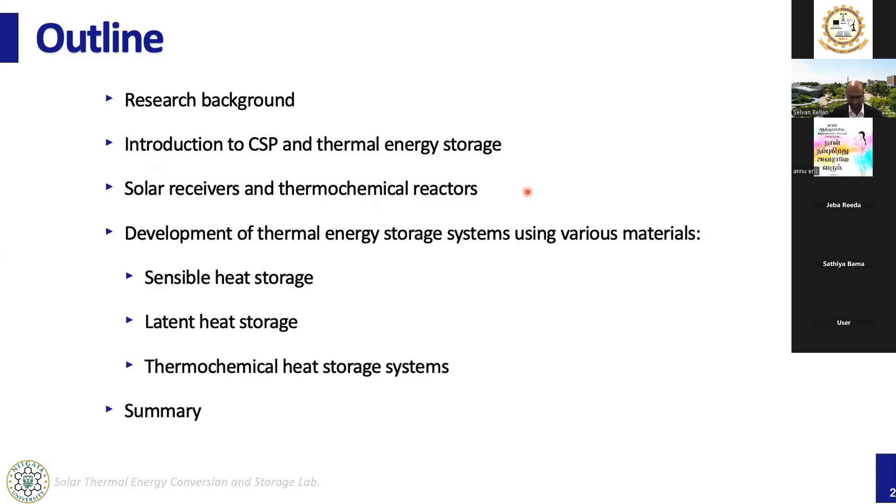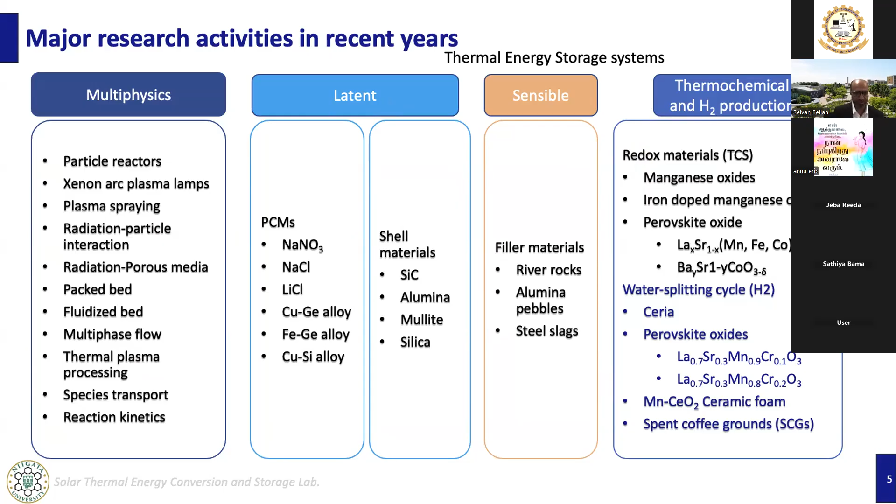So for better understanding, let me give a brief introduction about concentrated solar power technology, how it works, what the important components are, and why we are developing all these prototypes. Let me explain all those things. So let me begin. Let me give a brief introduction about the concentrated solar power technology.

I guess some of you may know about concentrated solar power. However, let me give a brief introduction for the people who are not aware of this technology. This technology converts sunlight into thermal energy first, and then the thermal energy would be used for electricity generation, or for fuel production.

As you can see, the plant consists of important components like the thermal energy storage system, central receiver, heliostats, gas turbine, everything. So let me explain how this plant works. This is a central receiver tower, which is surrounded by rings and rings of heliostats. Heliostats are nothing but mirrors, which track the sun's movement throughout the day and reflect the sunlight over the receiver.

In such a way, it creates concentrated radiation over the receiver. As a result, the receiver would be heated up. At the same time, heat transfer fluid, like water or molten salt, would be pumped to the receiver where it circulates and receives the thermal energy.

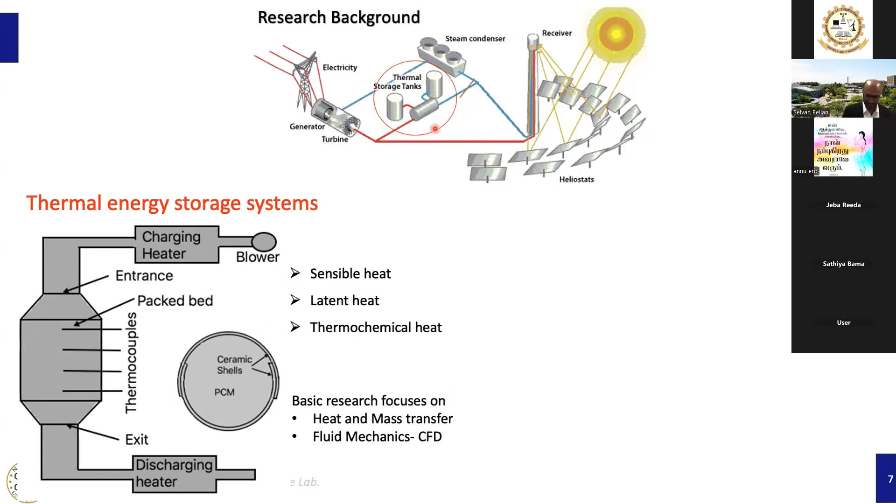Similarly, we have been developing various redox materials and perovskites for thermochemical heat storage. Let me present all these systems in the later slides. So this is just a brief introduction to where our research is mainly focusing in CSP components. This is one of the important components. And another component is the solar receiver.

Here the concentrated radiation can also be used for syngas or fuel production. For that, we have been developing various thermochemical reactors based on two-step water splitting cycles, as shown here. These reactors convert sunlight into syngas or hydrogen. Initially, the sunlight would be converted into thermal energy, and then the thermal energy would be used for thermochemical processes to produce syngas and hydrogen.

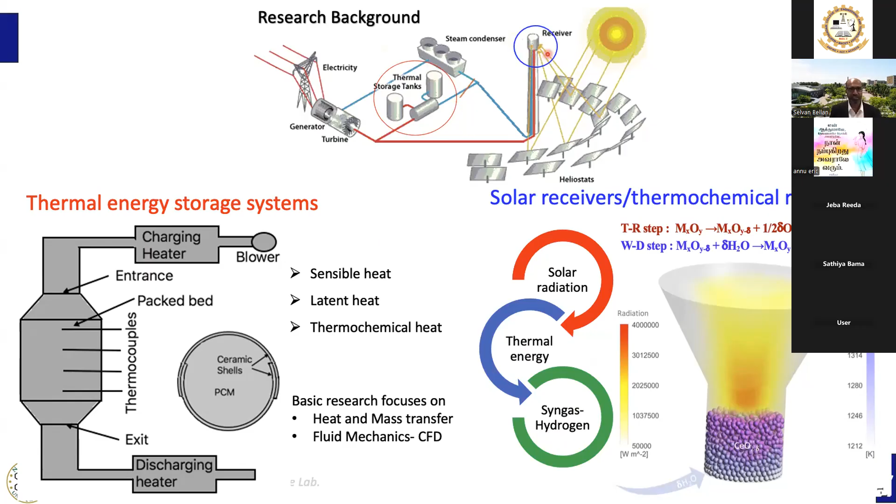So our research is mainly focusing on these two components. For that, we have been developing various prototypes. Let me present them one by one. Let me begin with the hydrogen production system.

To produce hydrogen using solar energy, various solar reactors have been under development by various research centers, with various concepts as well. And our concept is to combine the beam down optics and the fluidized bed reactors.

Can you hear me? Hello? Excuse me, can you hear me? Is everything okay? Yes, sir. Can you hear me? Yeah, is everything okay? Yes, sir. Okay, yeah. Thank you.

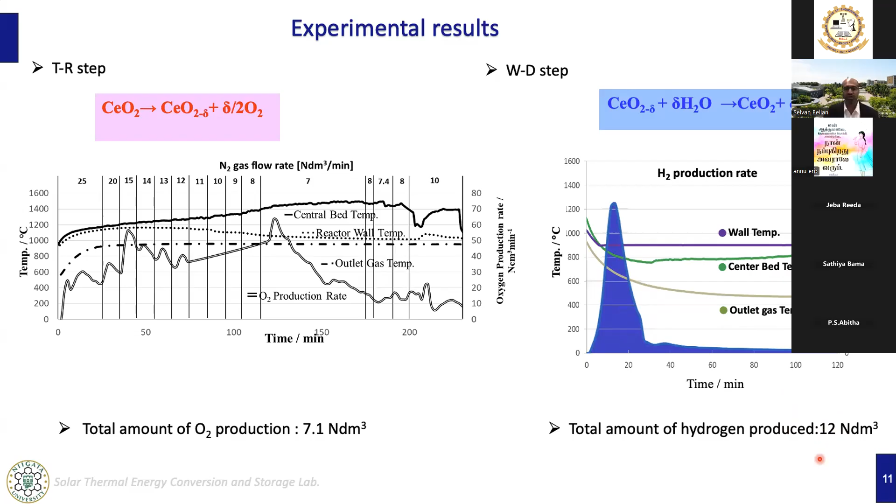And as you may imagine, this reactor involves various physical and chemical processes. So to understand the system and to improve the performance, we need the details of the heat transfer, the chemical reaction rate, and the radiation transfer inside the reactor. So we need all these details. To obtain them, we developed a numerical model by the combination of computational fluid dynamics, discrete element method, and discrete ordinate radiation model.

And this model has been developed based on various assumptions. The flow of the gas phase is simulated from volume averaged Navier-Stokes equations, and the motion of every individual particle inside the bed is tracked by Newton's second law. And the particle collisions are modeled based on the soft sphere method. Based on these assumptions, you can see the governing equations to predict the gas velocity and to track every particle. To obtain the particle temperature, we solve this equation, and to obtain the radiation distribution throughout the reactor, we use the discrete ordinate radiation model.

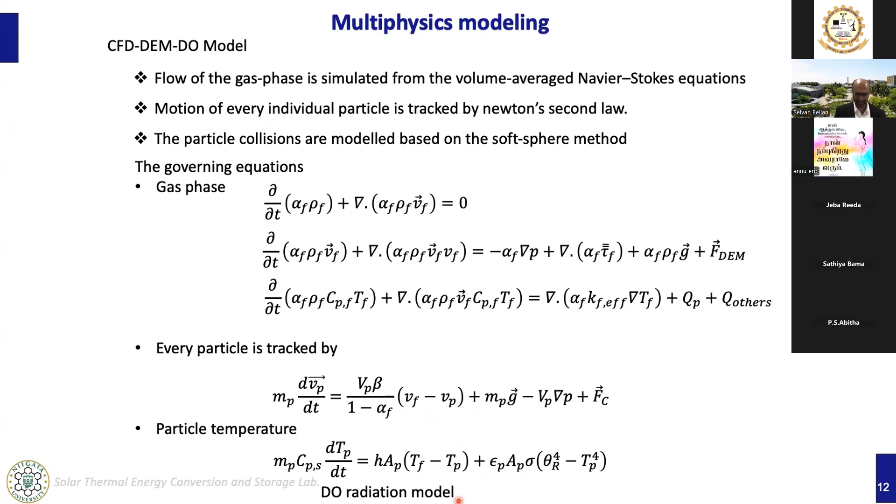So we developed the model, and then to verify and validate it, we performed experiments for the operating conditions shown here, and we did simulations as well. The experimentally measured and numerically predicted radiation distributions along the vertical and horizontal planes in the focal plane are compared here. As you can see, a reasonable agreement has been made between the simulation and experimental results.

And in this graph, you can see the central bed temperature, the pressure drop of the bed, and the gas temperature at the outlet. They have been compared here with experimental results, and as you can see, a reasonable agreement has been made between experimental and simulation results.

So from this model, we can obtain detailed heat and mass transfer and radiation transfer characteristics. As you can see, the particle temperature, the gas temperature, the radiation distribution inside the bed, the gas velocity, and the radiation profile. So all these details we can obtain from our model.

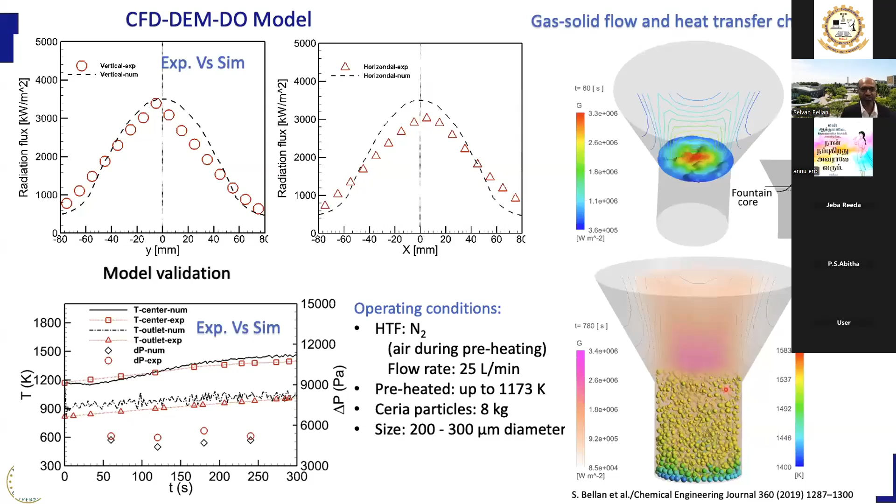So as I presented in the previous slide, using the lab scale reactor results, we have been upscaling to a 300 kilowatt reactor. For that, important operating parameters such as the particle size and the gas velocity, the appropriate operating conditions to fluidize the particles, and the effect of particle size, all these things we have been investigating using our numerical model.

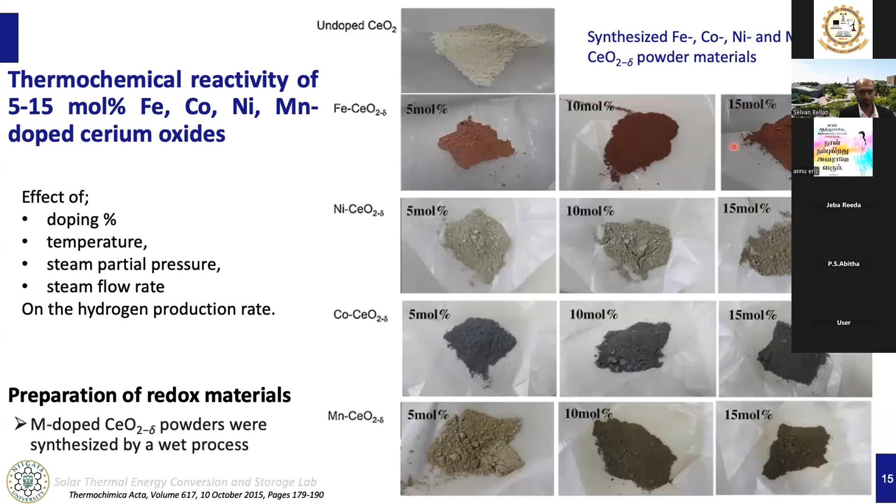the metal doping. And as you can see, the series of peaks are due to the fluorite structure. And as you can notice, there are no new peaks due to doping. And it indicates that 5 to 15 mole percentage of iron doped cerium oxide retains the fluorite structure of the cerium-based oxide as single phase.

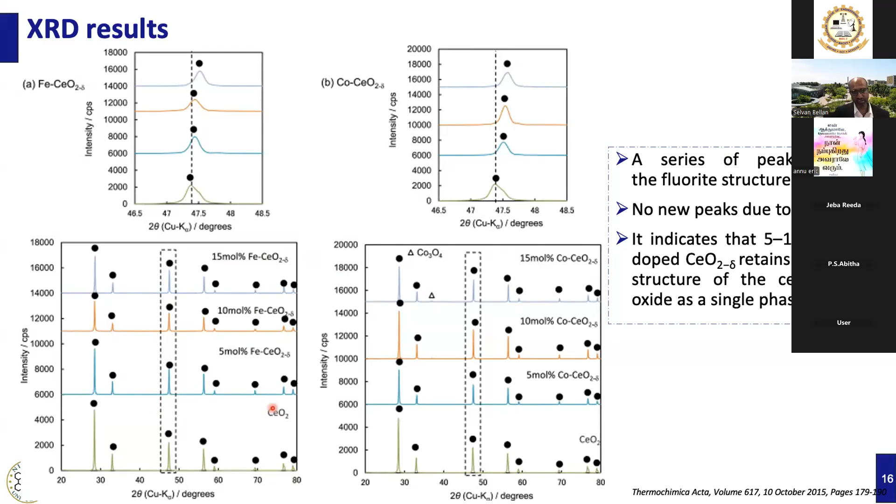And after synthesizing the materials, to test the materials, usually we take 1 gram of sample and put it in this platinum cup. And to perform the thermal reduction step, I explained the thermal reduction and water decomposition steps in the previous slides. The procedure is pretty much same, but here to test a small amount of sample, we use this kind of reactors, made of infrared furnace.

Usually we take 1 gram of sample, and then for thermal reduction step, we pass nitrogen gas. And when the temperature reaches more than 1,300 degrees, so in this case, we fixed 1,500 degrees Celsius, the thermal reduction step takes place. As a result, oxygen would be released, right? So the mixture of oxygen and nitrogen gas would be collected and using the mass spectrometer, we can measure what is the oxygen production rate.

Similarly, for water decomposition step, we put 1 gram of sample in this platinum cup. So during the second step, we need to pass nitrogen with steam. So for that, we have this oil bath, distilled water trap setup. As you can see here, we pass nitrogen gas. So the mixture of steam and nitrogen would be supplied to the reactor, and how much hydrogen would be produced, we can calculate using the water displacement method. So like that, using these 2 reactors, we can test the synthesized samples.

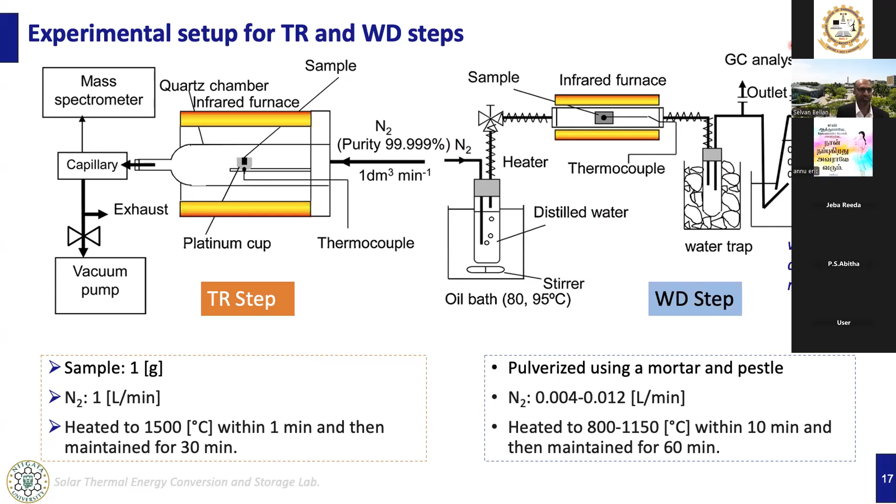And in this slide, you can see the cycling reactivity of 5 mole percentage of metal doped ceria. And as you can see, the oxygen evolution is nearly constant level in all these 6 cycles. So among these samples, 5 mole percentage of iron and cobalt doped cerium oxide showed a relatively greater oxygen productivity than undoped cerium oxide.

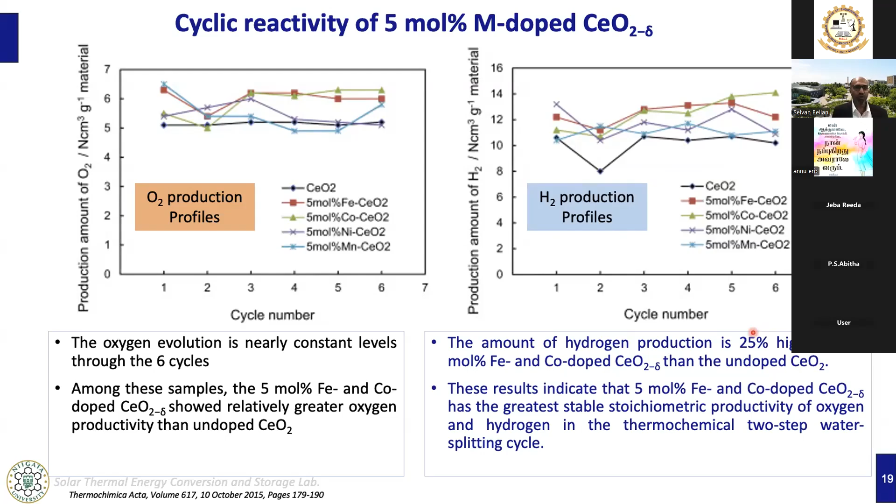This slide shows the overall, all samples, oxygen and hydrogen production for different amount of doping. This slide shows all samples like 5 mole percentage of iron, 10 mole percentage of iron, 15 mole percentage of iron. So other materials also. So from 5 to 15 mole percentage of doping.

So all results, as you can see, the peak rate of oxygen evolution rate for iron, cobalt, and manganese doped cerium oxide increased with increase in doping. However, the peak rate of hydrogen production decreases when increasing the doping. And lower content of a doping agent can favor the overall efficiency of the metal doped cerium oxide thermochemical cycles. That also you can notice.

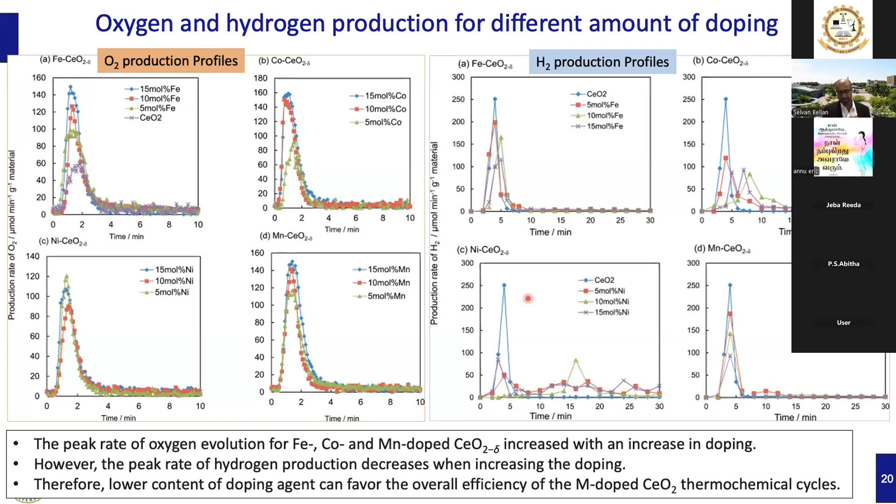And similarly, we have developed perovskites as well, the thermochemical two-step water splitting cycle using perovskite oxides based on lanthanum, strontium, manganite.

As you can see here, the oxygen production rate and hydrogen production rate for different samples. And this green line shows the ratio. And here you can see, again, for different samples. So like that, we have been testing various redox materials and perovskite materials for solar two-step water splitting cycles. And after synthesizing the samples,

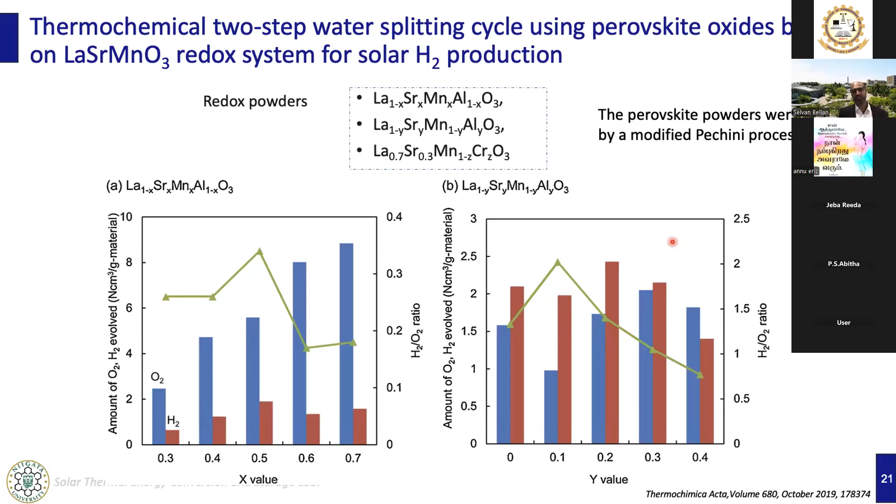We prepare different samples, and after that, this porous ceramic structure would be placed inside the reactor like a fixed bed. And then the solar radiation would be passed through the reactor, and then the thermochemical reaction, the so-called first step, the thermal reduction step, would be conducted for oxygen production, and subsequently the water decomposition step would be conducted for hydrogen production. So using this kind of ceramic porous devices, we have been producing hydrogen as well.

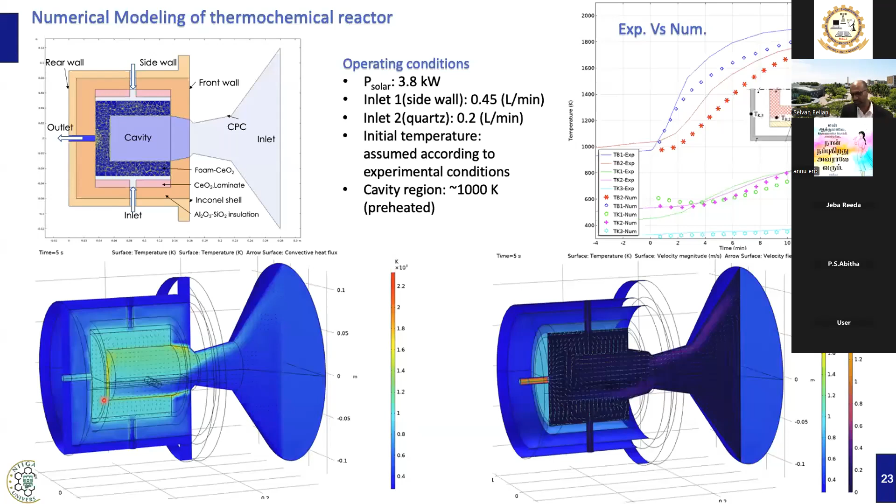So like that, we have been developing various thermochemical reactors to test various redox and perovskites to produce syngas and hydrogen. Now, let me talk about another part of the CSP plant, the thermal energy storage system, which is one of the main components in a CSP plant to produce electricity 24 hours.

So as I explained in the introduction slide, usually we supply cold heat transfer fluid to the receiver, where it circulates and receives the thermal energy, and it would be stored in the hot storage tank, right? And during the night time, we can take the hot heat transfer fluid to produce steam and electricity. So like that, electricity generation would be 24 hours around the clock. So the thermal energy storage system mitigates the mismatch between the energy supply and demand.

And this component is shifting the power generation period from peak hours of solar insolation to peak hours of power demand. As you know, during the noon hours, we have a very good solar insolation. The radiation would be very high, right? So during the noon hours, we can produce more electricity. But usually at what time do we consume more electricity? Usually we consume during the morning hours or during the evening hours, right?

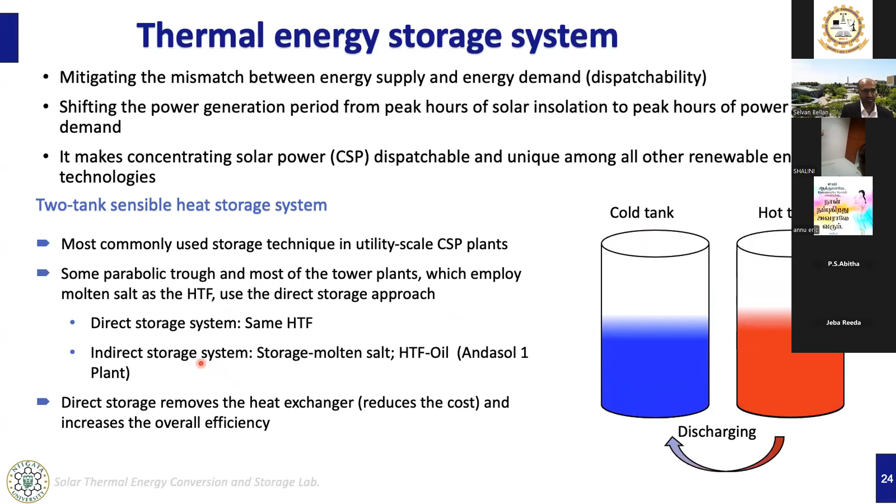So there are different storage concepts like direct storage system and indirect storage system. In the direct storage system, the same heat transfer fluid would be used in the receiver and in the storage media, whereas the indirect storage system uses different heat transfer fluids. The receiver heat transfer fluid would be different, the storage medium would be different. So we need an additional heat exchanger. So let me explain the direct, or two-tank sensible heat storage system using this schematic figure for better understanding. As you can see, we have cold heat transfer fluid, right?

So we supply the cold heat transfer fluid to the receiver, which is heated up by concentrated radiation. So the hot heat transfer fluid would be stored in the hot storage tank. Okay, so during the rainy hours or cloudy periods or at night times, we can take the hot heat transfer fluid for power generation, and then the cool heat transfer fluid would be supplied back to the tank.

So in such a way, using the same heat transfer fluid, we can supply from cold storage tank to receiver, and the receiver to the hot storage tank to the power block. So we don't need an additional heat exchanger. So the efficiency would be higher than the indirect storage system.

This is one example system, the Gemasolar Power Plant, using this kind of direct two-tank sensible heat storage system. As you can see, these two tanks are used for cold and hot heat transfer fluid storage. And this system gives 15 full load hour operation, which means if we don't have sunlight for 15 hours, we can produce 20 megawatt hour continuously for 15 hours.

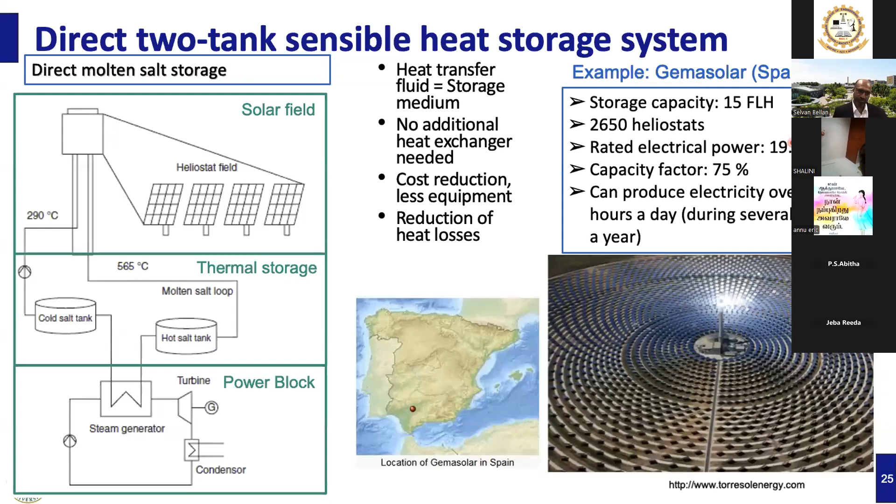So whatever the filling materials, the hot heat transfer fluid exchanges the heat with the materials, and the cool heat transfer fluid would leave through the bottom part of the tank during the charging mode. And during the discharging mode, the cool heat transfer fluid would be supplied to the bottom part of the tank, which extracts the stored energy from the capsules and leaves through the top part of the tank. In such a way, using one tank, we can do the charging and discharging processes.

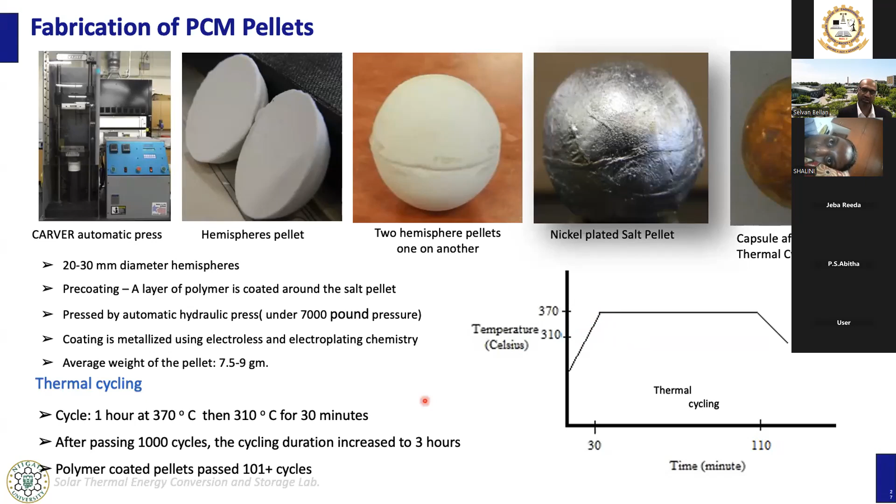As you can see, the test would be conducted between 310 to 370 degree Celsius. And after passing 1000 cycles, the capsule is stable and still working very well. So like that, we have been testing the degradation of the material for usually more than 2000 cycles. And to develop 1 kilowatt hour storage system, it requires more than 770 capsules.

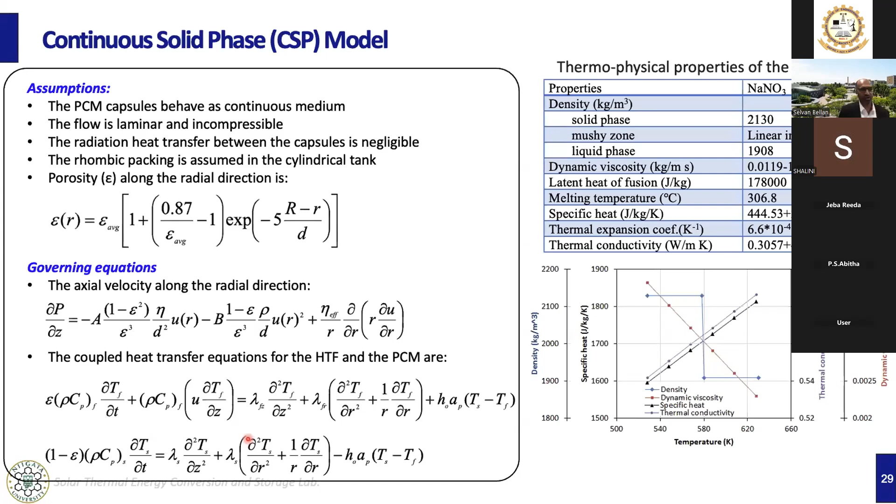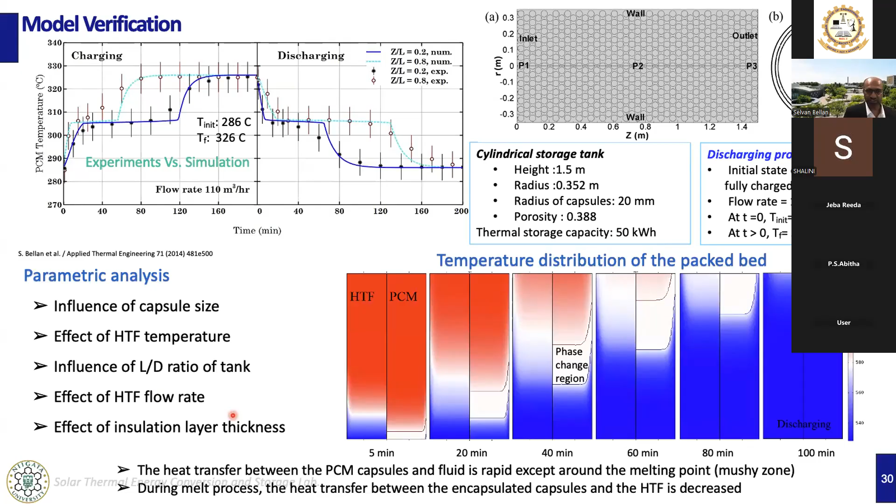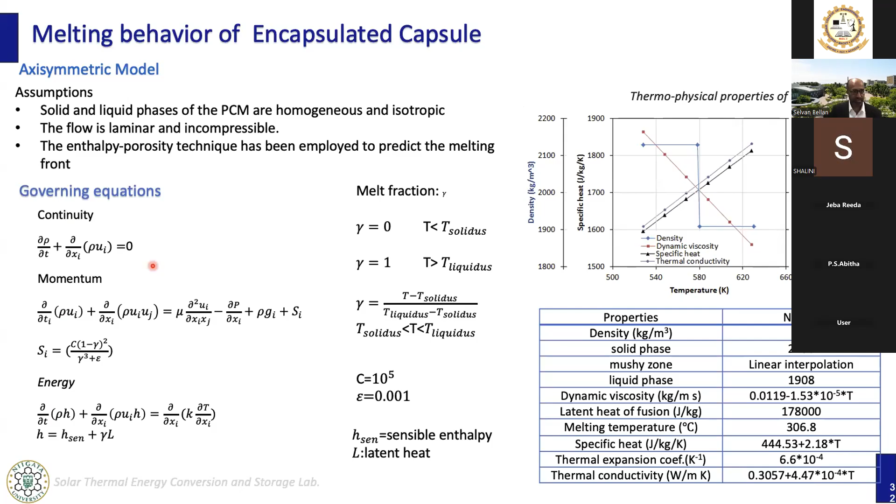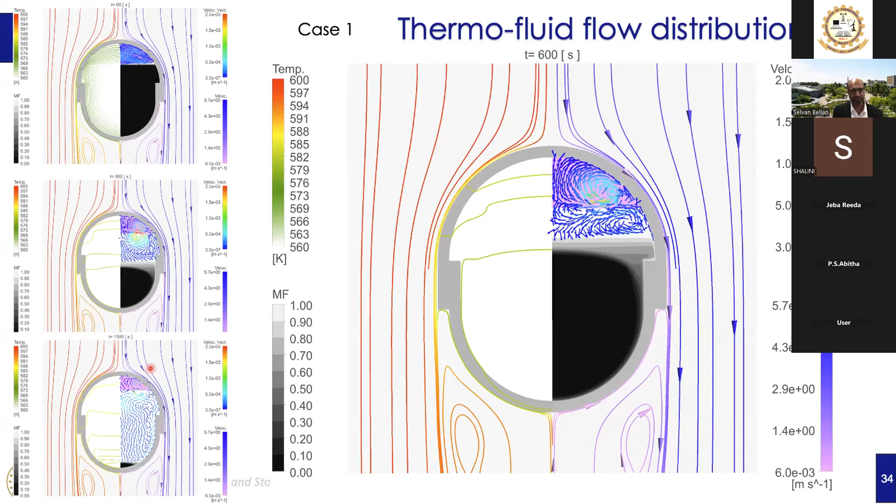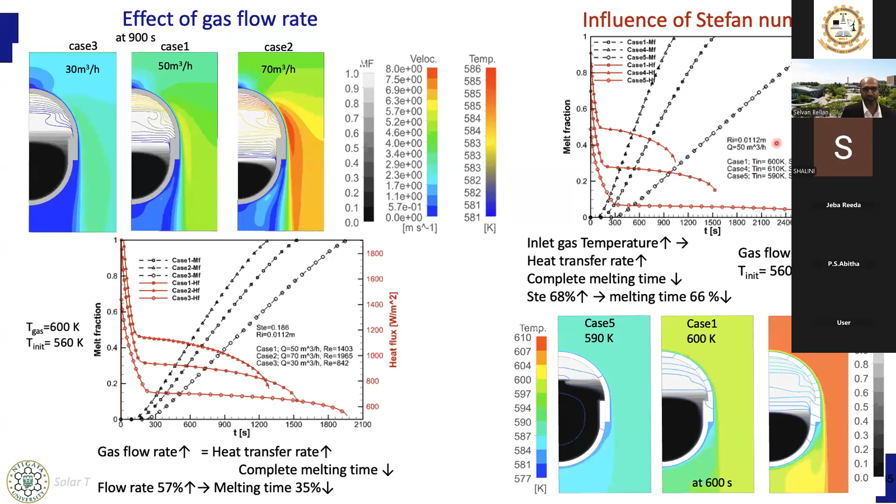Then we did the dimensionless analysis to obtain the generalized correlation for melt fraction and the Nusselt number. Using this Nusselt number, we can calculate the heat transfer rate between the capsule and heat transfer fluid for thermal energy storage systems. And this is another project.

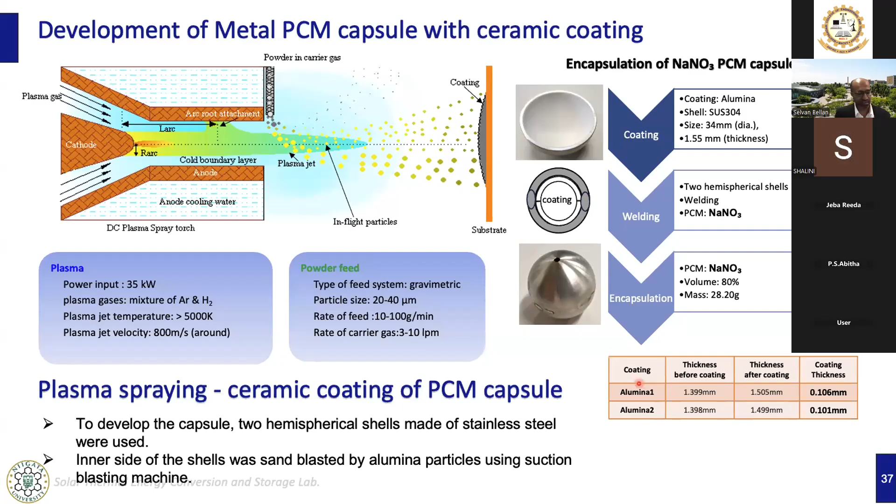We prepared two hemispherical capsules, then we joined them together and welded at the joint to make this kind of spherical capsule. In this table you can see the alumina coating thickness and details, and the other concept is the same.

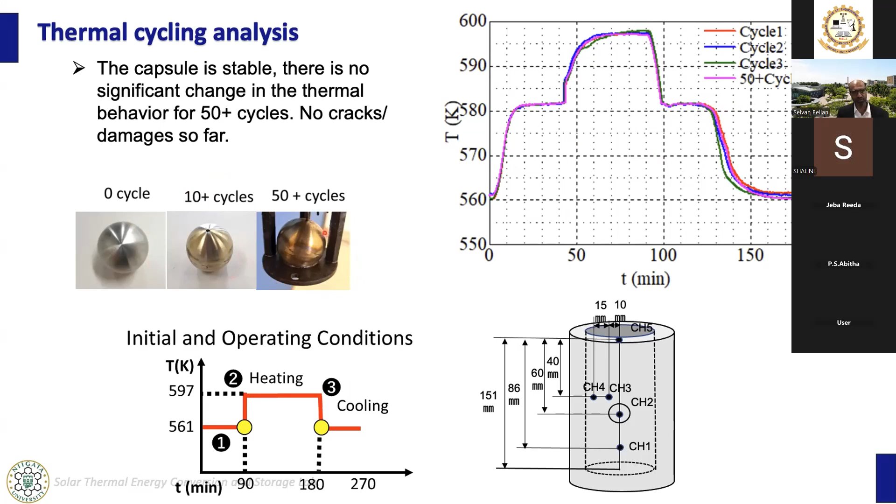Like that, we did charging and discharging experiments of plasma spray coated samples as well. These capsules are also promising, and we have been testing them. To develop this kind of capsules, we have been using various materials as well.

For example, we used iron germanium alloy as phase change material to develop a PCM capsule. It has potential as latent heat storage material. It gives higher storage capacity than other salt-based PCMs, and it gives quick thermal response as the thermal conductivity of this material is very high.

This material is thermodynamically stable in metallographic structure, and non-reactive with the shells. That is one of the important issues when you consider salts as phase change materials.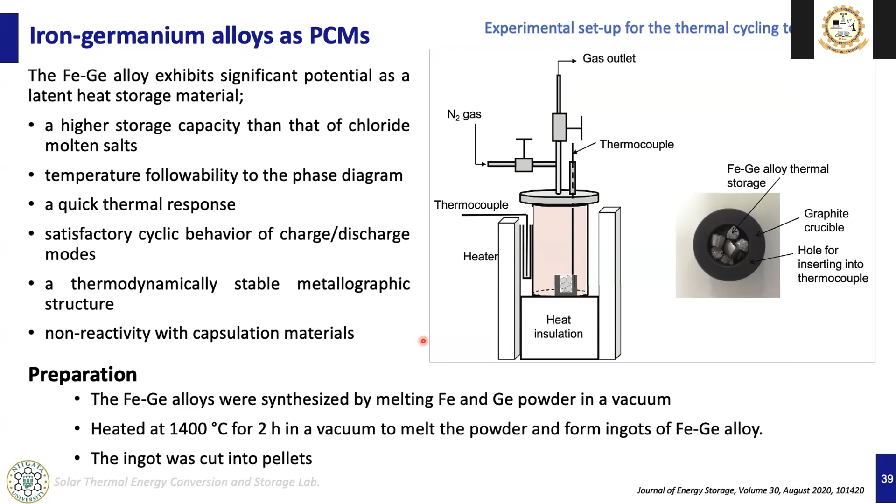To prepare these materials, the iron germanium alloys would be synthesized by melting iron and germanium powder in a vacuum condition, heated at 1400 degrees Celsius for 2 hours in vacuum to melt the powder and form ingots of iron germanium alloy. These ingots would be cut into pellets, and these are all usual procedures.

Here you can see the accumulated storage capacity of iron germanium alloy is much higher than other salt materials like sodium chloride and lithium chloride. These materials give a very good accumulated storage capacity per unit volume. In this graph, you can see the accumulated storage capacity per unit weight. But this is very important to compare different materials because the unit volume is important.

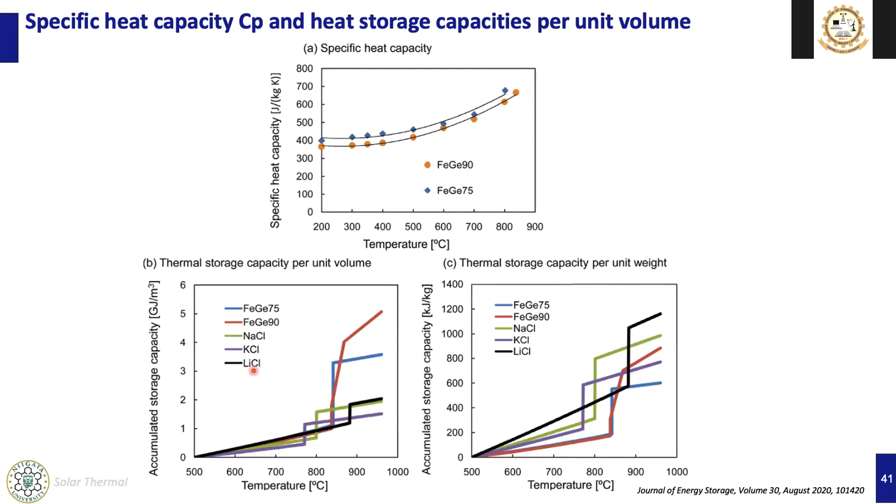Similarly to iron germanium alloy, we developed copper germanium alloy as well. We did XRD to test the patterns with different amounts of doping or percentage, and what the heat storage capacity is. As you can see, this material is also very nice to increase the heat storage capacities.

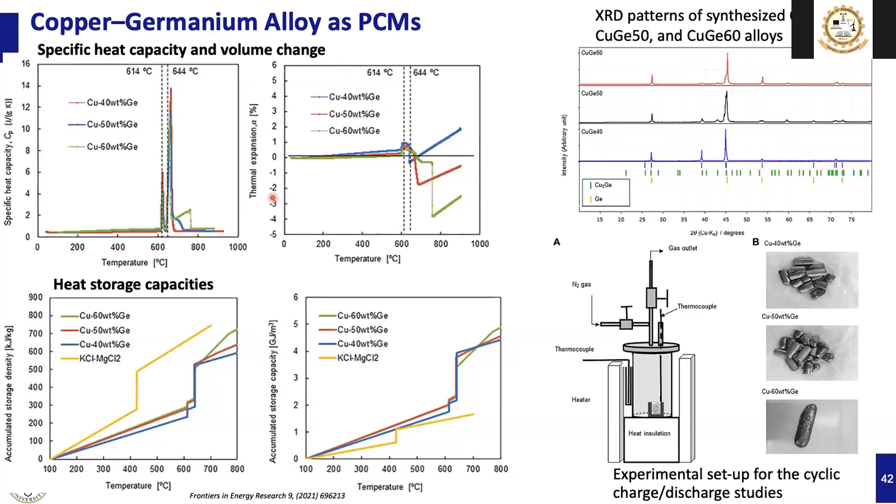Based on the packed bed setup, we developed different phase change materials, and based on the same packed bed approach, we have been testing and using different sensible heat storage materials as well.

As you can see, we use alumina balls instead of PCM capsules, and we tested different rocks, river rocks as well, as heat storage material. Using this technique, we can increase the energy storage density.

At the same time, as these materials are very cheap, we can develop inexpensive heat storage systems as well. So that is the main advantage of developing this kind of sensible heat storage system. So this is the prototype we developed in our research center. As you can see, we filled alumina balls, and then we did some experiments and simulations for the operating conditions as shown in this table. And we compared the experiments and simulation results. As you can see, we see a good agreement.

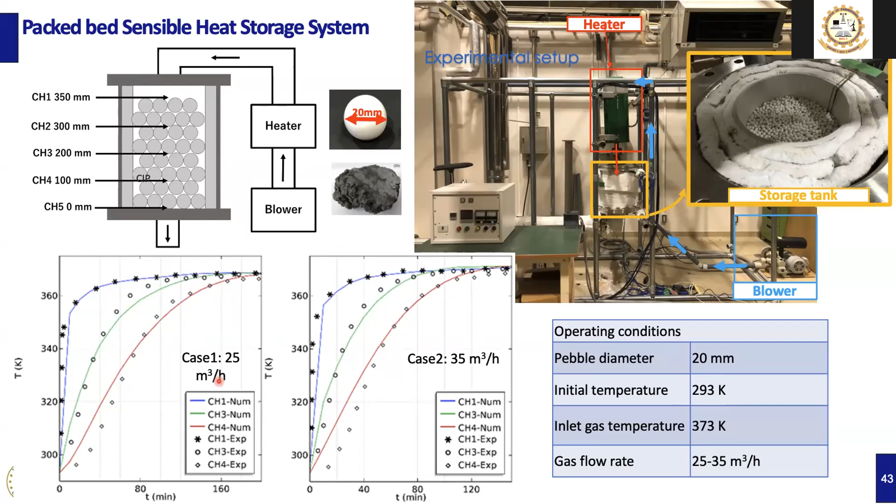Like that, we verified our model, and then we tested different natural river rocks as sensible heat storage material. These are all rocks collected from Morocco. Through a collaborative research with CIC energiGUNE Research Center in Spain, through this international joint research, we tested these river rocks as heat storage material.

So like that, we have been testing various materials, and then we have been developing small lab scale prototypes to test how these materials or prototype tanks work. And based on these results, we expand the design and tanks to pilot and commercial scale. This is our usual procedure.

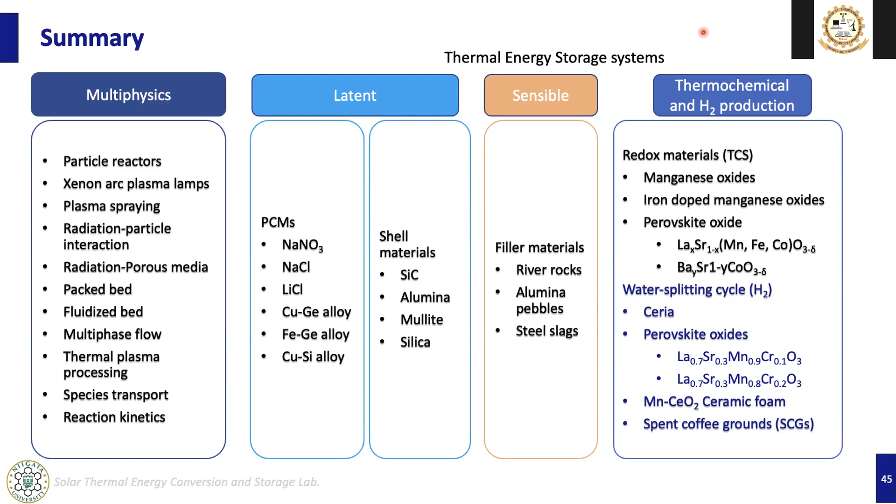And this slide gives you an overall view of different types of thermal energy storage systems. When we go from sensible to thermochemical heat storage systems, the complexity increases. At the same time, the heat storage capacity of the thermochemical heat storage system is very high compared to the sensible heat storage system.

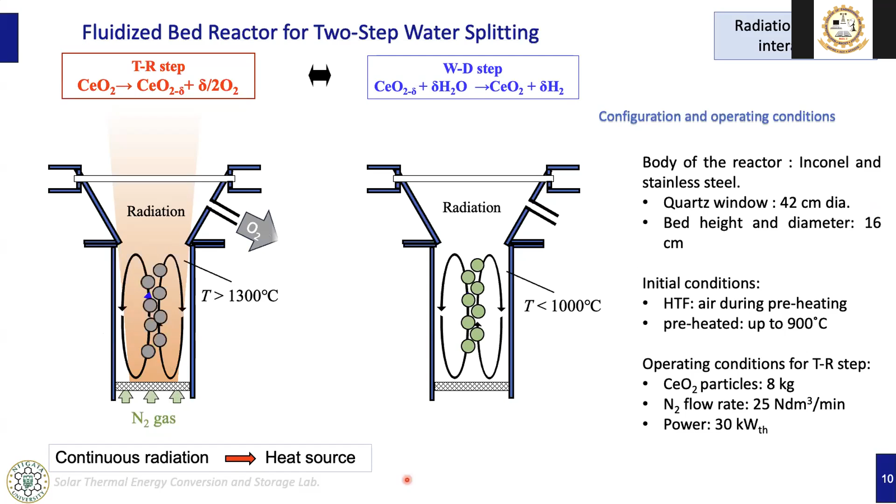During the morning hours, if you have sunlight, the sunlight would be converted into thermal energy, and then the thermal energy would be stored inside the tank. Okay, so we have enough amount of hot heat transfer fluid. During the afternoon, if there is rain, obviously there won't be sun, so we cannot get hot heat transfer fluid from the receiver.

So in that case, we can take hot heat transfer fluid from the storage tank to generate steam, and we can generate electricity. So it is possible during the rainy days. But if the rainy days continue for a couple of days, and we don't have enough hot heat transfer fluid, we cannot produce electricity. So it depends on the storage capacity of the storage tank.

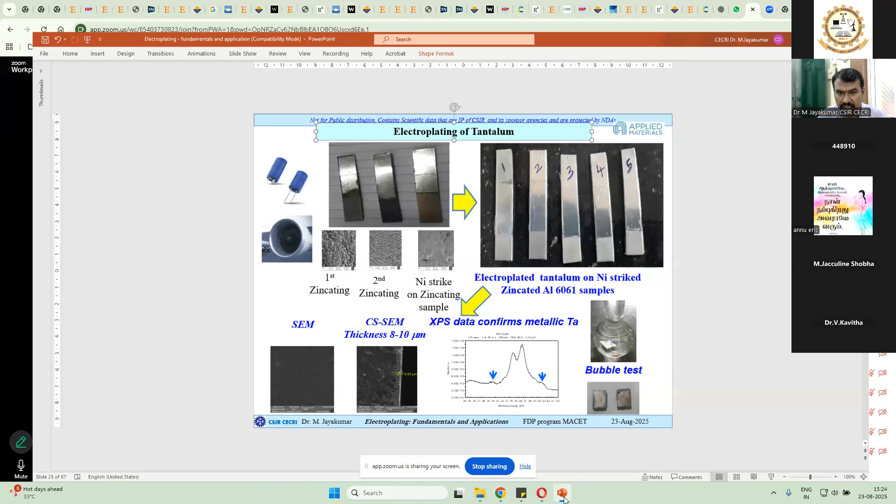Is the screen visible? Is the slide moving? Yes, sir. The screen is visible. Okay.

Just before I start, what is the background of our faculty, ma'am? Are they from engineering college or from arts and science college also? Both the colleges. It is like a faculty development program, so faculty from different organizations will be attending this session. Okay. They will be from chemistry background, physics, all background, right? Both physics, chemistry, and also engineering, sir. The research scholars also participate. Okay. There are nearly 77. Okay.

So hope the slide is visible, right? So for the next maybe 1 hour or so, what I will try to give is whatever we are working in the field of electroplating. Some of you who are from the chemistry background may be aware that electrochemistry is part of your physical chemistry, and we know what is Faraday's law, its application, and batteries. And in the last 10 years, there is a lot of interesting work in batteries. So some of you may be working in batteries, some of you at least may be aware batteries is one field. So in the field of electrochemistry, one unique area is electroplating.

I will not go too much into depth and give a lot of unwanted keywords or jargon to confuse you. My aim is just to give an idea what we are doing at CSIR-CECRI in the field of electroplating. Although we are using electroplated equipments every day, we just don't know the importance of electroplating. We know batteries because we have batteries at home for the UPS, in our mobile phone, laptop, even in two-wheelers and four-wheelers. In the entire field of electrochemistry, batteries are well known because they are related to energy storage and we use them every day.

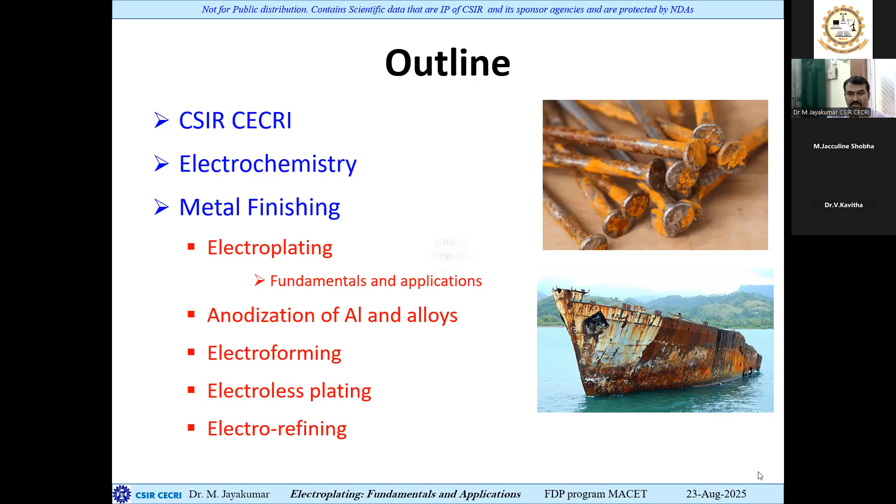So going back to the field of electrochemistry, let us have a quick idea about what is CSIR-CECRI. Maybe my other speakers from CECRI, Dr. Pandikumar or Dr. Tamilarasan, must have covered it. So I just wanted to spend a couple of minutes here. CSIR-CECRI is part of the CSIR group of laboratories. The abbreviation is Council of Scientific and Industrial Research. This is spread across 38 places in the country. Of those, three labs are in Tamil Nadu. So CECRI is here.

So we are in the tri-junction of Rameshwaram, Madurai, and Trichy. So we are in the middle of this triangle, around 2 hours from all these places. Another two labs are located here: CLRI, which works on leather, and structural engineering, which is SERC, Structural Engineering Research Center. So these three labs are in Tamil Nadu.

The primary reason why such a place got it is because all our labs, if you see, are in Delhi, Bombay, Chennai, whereas CECRI is in a very remote place even today. Although Karaikudi has become a corporation, it is still a small center. This particular town is also the hometown of Dr. Alagappa Chettiar, who is the founder, the brain behind CECRI Karaikudi, because he also happened to be a friend of...

You can see the photos here. Pandit Jawaharlal Nehru is there, and this is Shanti Swarup Bhatnagar. He is one of the founders of CSIR. This is Dr. Alagappa Chettiar, and the foundation stone was laid by Pandit Jawaharlal Nehru in 1948, and our institute is as on date close to 78 years.

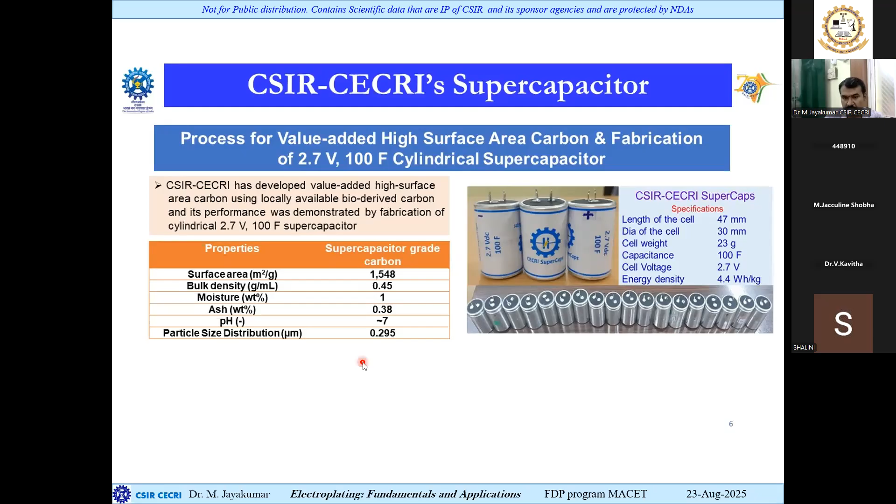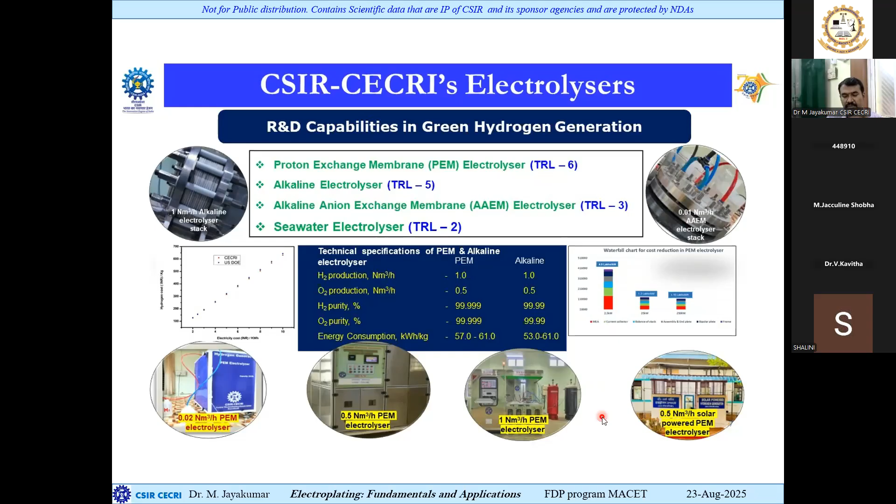So the field of electrochemistry, unlike other fields, is not a very old field.

I think slides are moving, right? Yes, sir. Yeah, okay.

So if I take the field of battery, everybody knows the lithium-ion battery, but the lithium-ion battery is today's technology. If you go back exactly 220 years, there was no battery at all. Michael Faraday found a relation between magnetism and electricity, and electricity didn't even come as a reality. So it was in 1800. Alessandro Volta, a native Italian, developed the voltaic pile. All he did was make stacks of zinc and copper. In between, there's a cloth soaked with sodium chloride or any other salt as a separator.

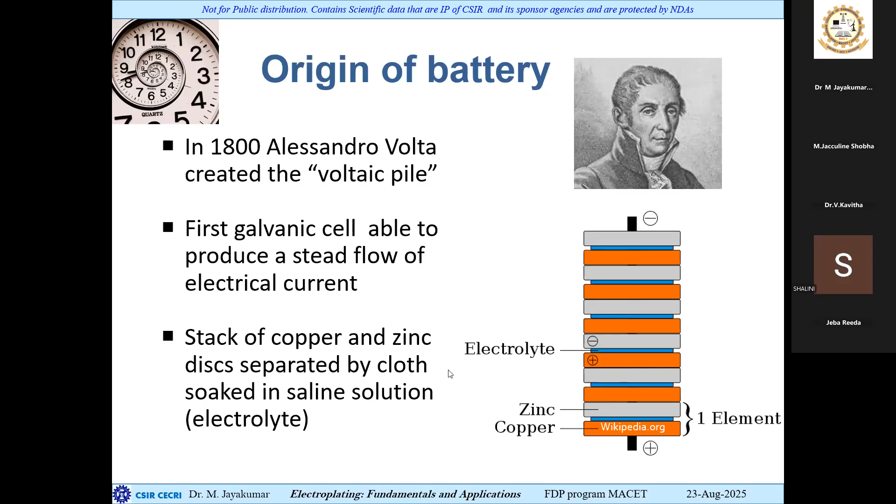Around the same time, there was an Italian chemist, Luigi Brugnatelli, who is considered the father of electroplating. Although he was Italian, he didn't stay in Italy; he went to France. That is where the electroplating field itself was invented. When I say electroplating, plating is nothing but coating.

So when I want to do a coating with current, if you want to apply current, there must be something which conducts the current, for example some ions, some electrolyte. Pure water doesn't conduct electricity, you may know. Similarly, it is not possible to do electroplating without current; that would be called painting. So painting and electroplating are similar. If you use an organic polymer, that is called painting.

If you use electrochemistry and plate a metal or alloy, that is called electroplating. So from 1805, when he invented it, for the next 30-40 years nobody knew that the French had this kind of technology. Only after 40 years did the Russian as well as English people discover it, which resulted in the field of electroplating.

And also, it is not like electroplating was made for everybody. When they made electroplating, they were very sure this was for royal, rich people. Only the kings, monarchs, aristocrats would be able to use it, because you don't need platinum, you don't need gold, but you can see the finish here. So by using a copper or maybe steel substrate, you can coat with silver and it will give you a very silver finish. You don't need 100% silver in the spoon or fork. All you have to do is have it in some low-grade material, and you can do the plating.

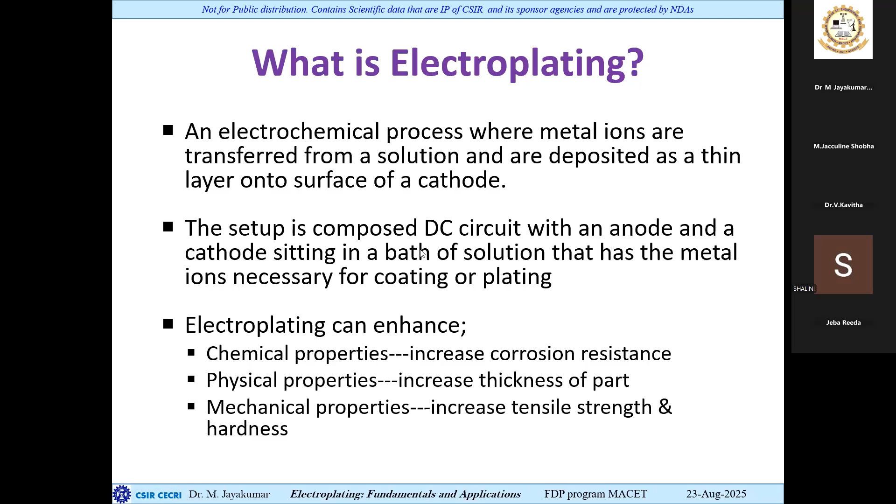So electroplating is nothing but when I pass current, there is a movement of ions, and the ions get deposited as a coating. So typically you will have an anode and a cathode, and the cathode is where my metal wants to deposit. So if you are given a small tank and you want to do electroplating, you will require one DC rectifier, which is the source of energy; you can use a battery also. In fact, with a 1.5 volt normal everyday battery, there are a lot of YouTube videos on copper plating.

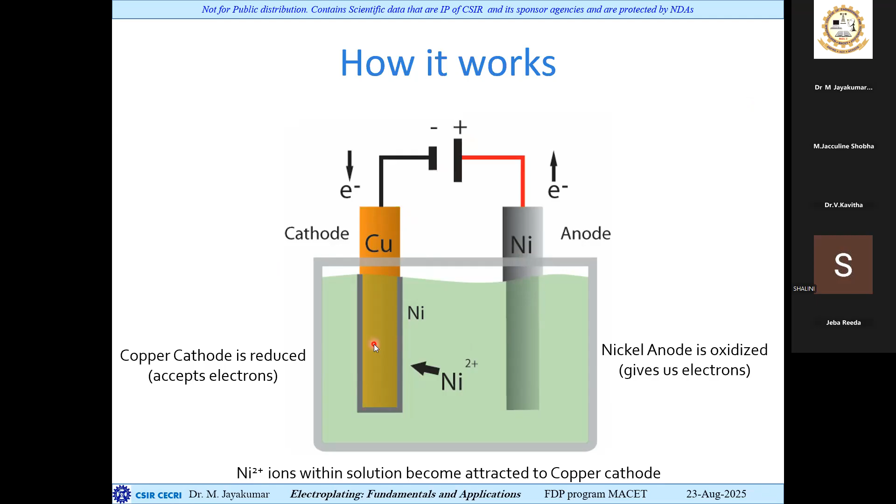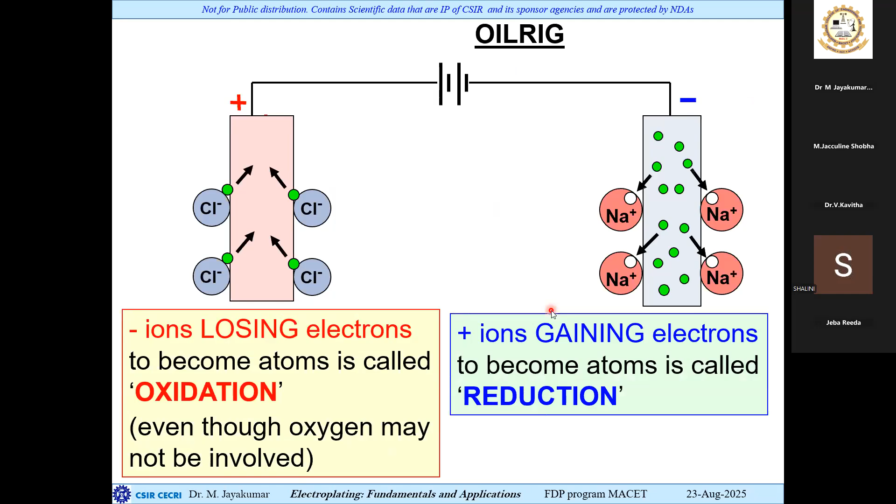Okay, because copper is a noble metal and its potential is positive. So when you apply the potential, nickel is relatively less noble, whereas copper is more noble. So nickel gets oxidized, and over copper nickel gets deposited. So the reaction, in layman's terms, is this. On one side you have the positive electrode, which loses electrons. When it loses electrons, that is called oxidation. On the other side we have the opposite electrode, the cathode, which gains electrons. That is called reduction.

So OIL RIG: oxidation is loss, reduction is gain. If you want, you can abbreviate it, so you can easily remember that oxidation is nothing but loss of electrons, and reduction is gain of electrons. Electroplating is gain of electrons. So now if you pass current with two electrodes, will electroplating happen? I have one battery source, I have two electrodes. Will electroplating happen, can anybody answer?

Anybody? Hello? Yes, sir. Yeah, can anybody answer the question? If I just have a battery and two electrodes, will electroplating happen? So we need electrolyte. Yeah, exactly.

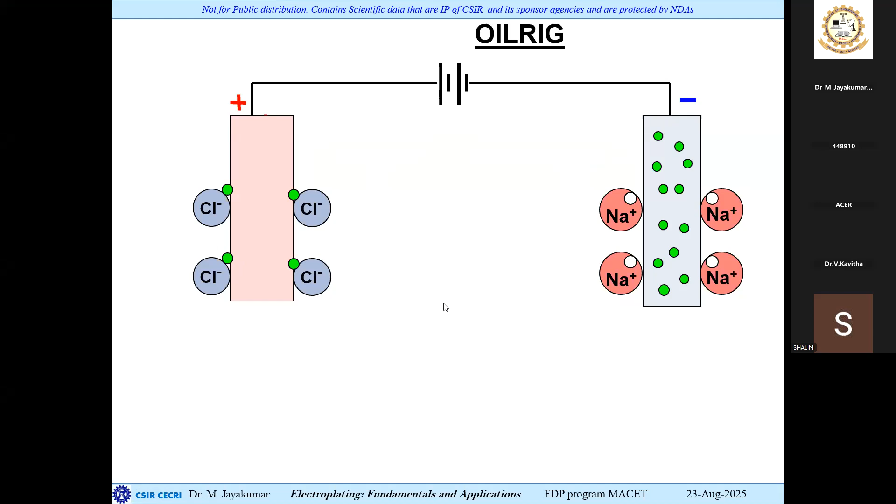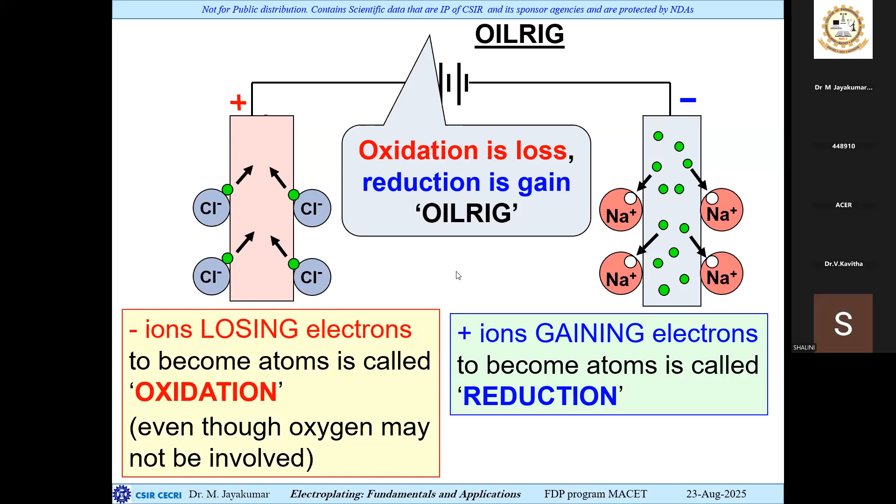Oh, thank you. So you need the electrolyte, which is where your metal ions will be. So when we do electroplating, the positive electrode can be an insoluble electrode or a soluble electrode. If you want to do nickel plating, I use nickel as the anode. Or in some cases, in the case of gold, we don't take the anode as the particular metal. We use it as a salt. The salt will be dissolved in a suitable solvent, mostly water, and that becomes the electrolyte. So the electrolyte is where your actual reaction will occur, and you can take the typical case of nickel here.

So nickel gets oxidized at the anode and comes into the electrolyte, and Ni2+ travels into the electrolyte. It is not like the nickel coming from the anode will travel all the way to the cathode. No, in reality nothing happens like that. Nickel dissolves a little bit from the anode and becomes ionized, whereas of whatever nickel is in the bath, part of it gets reduced, and that nickel gets deposited onto the cathode.

So the basic idea is whenever we have electroplating, the metal ion dissolves at the anode in most cases, whether it is nickel, zinc, copper, so many systems, and most of the non-noble metals. In noble metals, we cannot do it like that.

Okay, noble metals require an insoluble anode. So in this case, if I have only the nickel salt in my electrolyte, that will be insufficient to be called an electrolyte. Whenever we have a cathode, there must be a catholyte. We also must have an anolyte, or maybe cation or anion.

Simply put, when we have both, one of the species will go to the cathode, another will travel to the anode, so that the reaction equilibrium is maintained. One side is reduction, another side is oxidation. So whether it is nickel sulfate or nickel chloride, nickel will travel towards the cathode and sulfate will travel towards the anode, and they will either gain the electron or lose the electron. Okay, so that is the basic idea of electroplating.

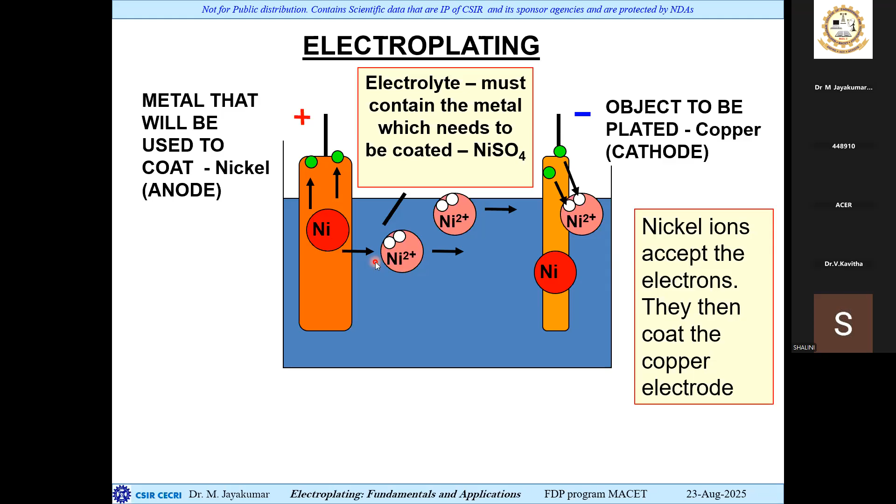So when we say electroplating, it is possible that you can have different systems. I can deposit a metal, I can deposit an alloy, all will come under electroplating. Or I do not go for metal reduction; I want to oxidize the metal. That is the black utensils we use in our home, like the pressure cooker, which is anodized. Even there is jewelry available today; people call it anodized jewelry. It looks black, but once it is black, there won't be any scratch. They are very good and have very long service life.

In addition to electroplating, there is a specialized micro coating done by pulse plating, where instead of giving direct DC current, because you cannot do electroplating by AC current, that is a very limited area where AC current is used, with pulse plating we turn on the current for some time and off for some time. For example, in 1 minute, theoretically, for 10 seconds power is on, 5 seconds off. 10 seconds on, then off.

So compared to continuously giving some current, say 1 ampere, for a very long time, you have a pulse technique, on, off, and there is an additional technique called the reverse pulse technique, where you turn on for some time, metal gets plated, and then you dissolve part of the surface. So better sticking. Sticking, in electrometallurgy and electroplating terms, is called adhesion. Sticking is achieved very easily.

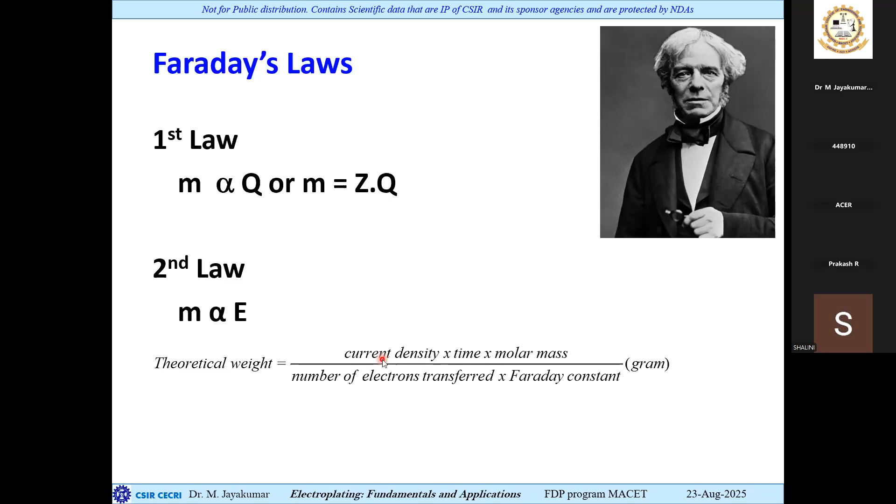So now, given all these parameters, Faraday simply gave two laws. First, if you pass current, something will form, and how much forms is related to the current passed. Second, if you pass current between two systems, both will give different amounts of product depending upon their molecular weight and number of electrons. This is Faraday's law.

This is the pulse plating and pulse reverse I was telling you about. Pulse reverse is a unique technique. Instead of continuously giving current, you have on time and off time. So current runs for some time, say 10 seconds. I am saying 10 seconds or 1 minute only for your understanding; actually it will be in microseconds. We will have this kind of on-off cycle, technically 30 to 60 in a second, so it will be on for maybe 1 or 2 microseconds per cycle.

So by passing current and switching off for some time, it is possible to have a very uniform coating, which is better than pure direct DC current. It is like when we go for a long run, we stop in between to have some water and refresh ourselves. That is what is happening in the pulse. This is where the metal is depositing; how much current you are supposed to give, you give it. And this is where no metal will deposit, and this is the off time.

Now people thought, is on and off sufficient, or do I have to do something different? We come up with so many crazy ideas, right? So people thought, I will switch it on for some time and let it run, then stop it, then go to the opposite side. So from the cathode itself, a small amount of metal will dissolve. That is called the typical pulse reverse current. When it is dissolving, it makes some roughness on the surface, and the roughness affects the next cycle.

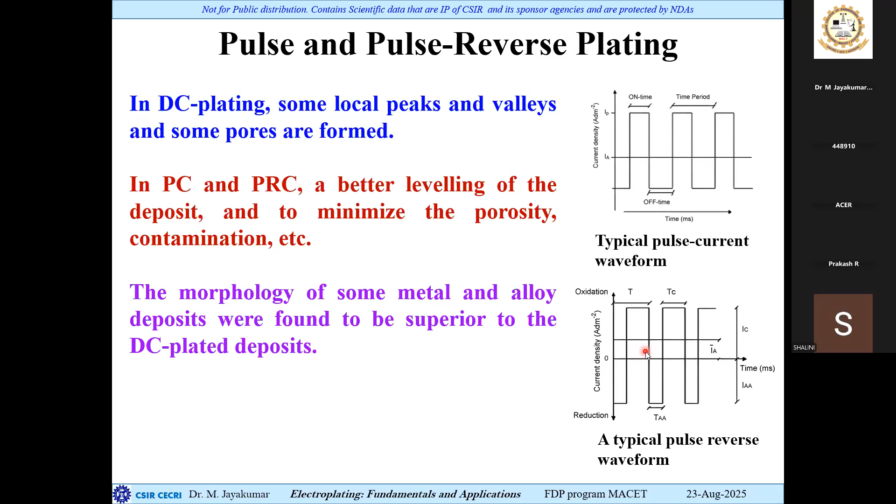This is a very interesting idea. Some gentleman thought, okay, I have a small current source, what we call a rectifier. A rectifier is nothing but something that converts our AC current to DC. Now there is equipment which gives us current. But why do I have to keep the electrolyte in some tank and create so many issues?

Is it possible to mix our traditional painting, maybe, along with your typical electroplating? Then he thought, okay, why don't we come up with the idea of electroplating which is done by brush plating. The brush is nothing but the brush which is already here. The aim of this brush is to give a uniform coating, even in very intricate areas.

For example, I made a factory. In that I used some electroplated component. If I cannot cut and remove that full equipment, for example at Kalpakkam or some shipyard, some big equipment, we cannot take it to the lab and do any analysis. So it will be in that shape only, in that place only. In brush plating, all the techniques are the same. It is easy to deposit in inside areas also.

That makes electroplating very interesting, because otherwise you have to take the cathode and anode and immerse them into the electrolyte. When people thought about it maybe 20 or 30 years back, the electrolyte was primarily just to deposit and get a uniform deposition. But brush plating is like normal plating with current. Simply, you have to understand that. I'll just show you a small video that will give you a clearer picture.

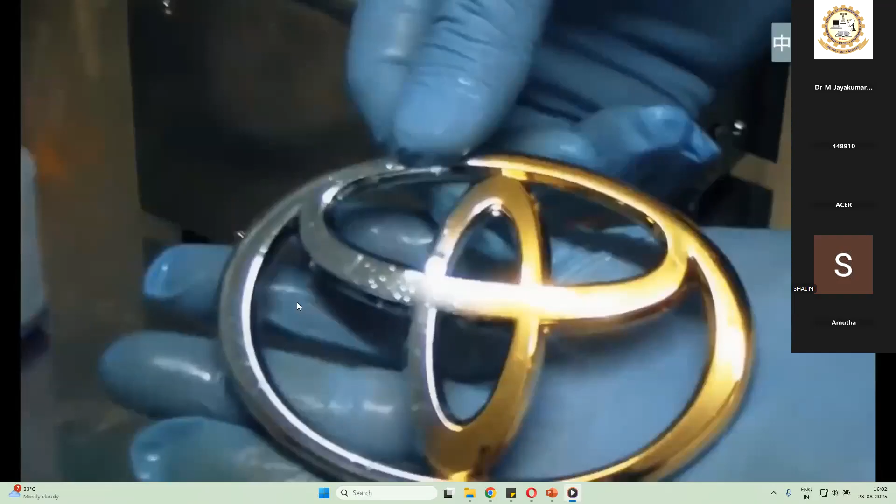So, coming back to the class, can somebody tell me in your comments, what is the color of your typical gold plating, whatever you observed from the video? Anybody there?

Okay, yeah. So gold is deposited on these different logos, right? Whatever logos we see every day, Toyota, Mercedes-Benz. So this is a typical application of the electroplating process for an everyday object. I am not saying everybody is using a Benz every day. The same technique can be used for jewelry, what we call imitation jewelry. We can make it with copper and gold can be deposited.

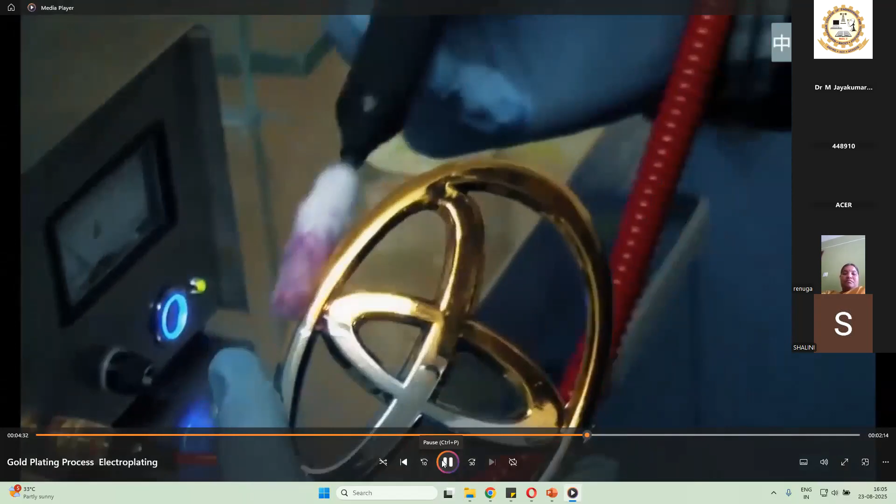See? So red is the code for your cathode, and in all your electrochemical cells, if you have a cathode, you must have an anode, and both must be connected through an electrolyte. The concept remains the same. You can see on the back side, this black lead is connected. Let us see, maybe.

Even in this video you can see the black is there, which acts as an anode, and this rod inside the sponge is considered the cathode. So this moves, releases gold, and it just deposits. Okay. So the simple idea is this is the cathode part, and this is the cathode lead, which means it is electron rich here. So when we add some electrolyte inside this, there is an anode. From here, the gold ion travels to the cathode where it gets reduced. So current is flowing in the

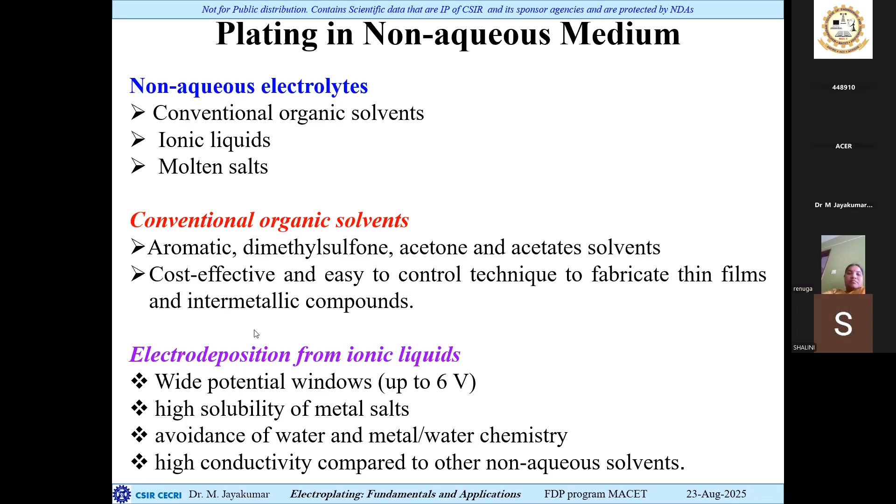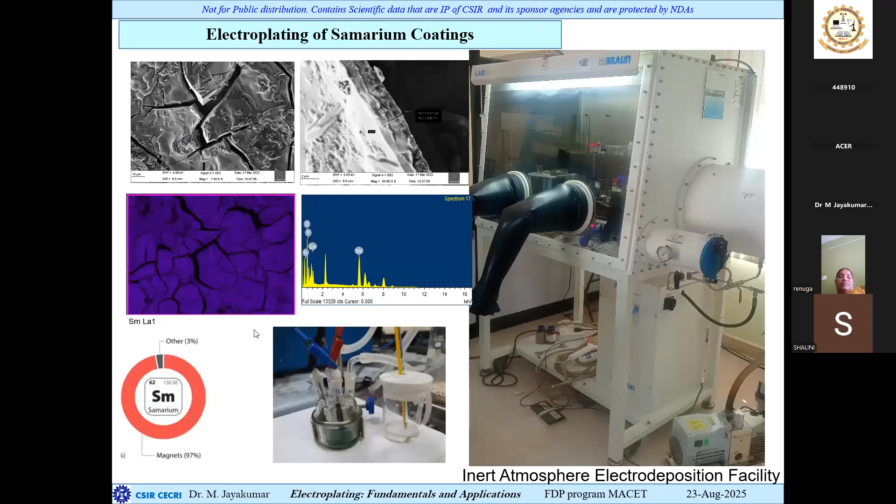So now the typical home utensils, whatever we use, whether it is gold or silver. There are many people even today who eat with a silver spoon. We use the phrase "born with a silver spoon," right? The royal people, kings, used to have silver spoons. People who cannot afford that but still have a lot of money go for silver or platinum spoons. Instead of pure metal, they go for plated metal.